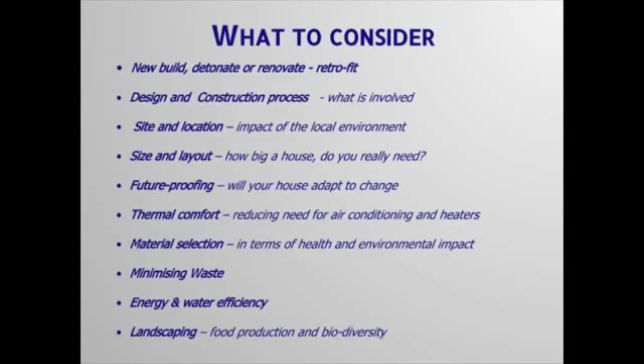So I'll cover the design and construction process a bit. Site and location is obviously crucial in terms of how you design a home that's going to work well with the environment. The size and layout can have a huge impact. Future proofing - we build our homes for probably a minimum 50-year time span. If we do it well, they'll last much longer. So you're talking 2 or 3 generations are going to occupy that building. So it's quite crucial that we do get it right and we make it work long into the future.

I'll touch a bit on thermal comfort - that's an area I do specialise in a bit. Material selection and minimising waste. Energy and water efficiency is very important, but I'm not going to go into that because it's such a broad topic, and we have had other talks on it. And landscaping, how to incorporate that, because sometimes that's something that is a bit overlooked. As I go through, I may skim over some things, so if there's something you want to know a bit more detail about, just feel free to stop me.

One thing that I guess is constantly changing is our understanding of what sustainability is and how we can do it. And I did mention that primarily our focus has been on minimising the negative impacts, and we should be really aiming to achieve positive impacts. How can we do a development that actually has a positive outcome?

The difficulty with that is the more we get into it, the more complex it is. There has been a focus in the past on the technology of it, putting solar panels on or making the house better insulated or whatever. But it's a much more complex situation than that.

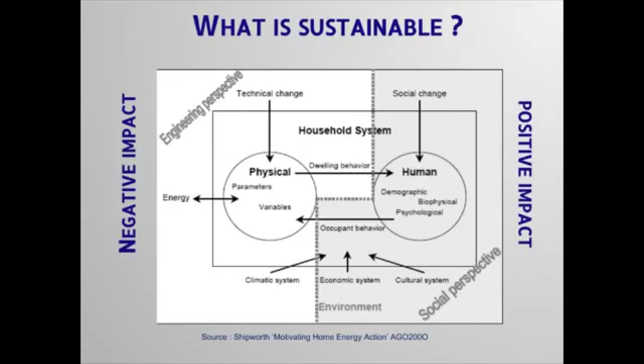It's the occupants in the house, how they use the house, it's their social situation. You can make a house a lot more sustainable, but you could be in a very unsustainable situation where you live - you might have to drive a long way to get to work. And so there's a whole lot of other factors that can impact on how sustainable your living can be. You'll see down the bottom there's even things like the economic system, which I find is a real challenge in my practice, is finding designs and doing a building that's affordable for people. In Sydney, renovations are very expensive, and the challenge is to do that in an affordable way, so that the client doesn't end up with an unsustainable financial situation. It's crucial that all these things are in balance.

In terms of positive impacts, we can certainly have a positive carbon output by putting on plenty of PV panels and reducing our energy use. But there's more positive impacts we can have on the social side.

If we take a house that's cold and unhealthy and turn it into a house that's light-filled, well insulated and a lot healthier, then there's a positive impact on the life of those occupants. And that has a flow-on effect in society in terms of reduced health costs, higher productivity, a whole range of issues. We can also have a positive impact in terms of increased biodiversity if we're smart, increasing plants and opportunities for wildlife and animals, because we're creating a healthy environment that will prosper more.

So you can see it's quite a complex challenge. Where to begin? If you're a homeowner yourself, doing your own research is most important, so you understand, so when you talk to people you've got a good grasp of what the issues are. Unfortunately, a lot of designers and builders may not be as educated as you would hope on these issues.

And building a team is an essential item. Traditionally, the construction industry is run on a more adversarial type of arrangement, which is not ideal. If you really want a sustainable outcome, you've got to break through that, and the way to do that is to create an open, honest atmosphere, be clear about what you want, and engage everyone.

You can select a designer, and there's plenty of opportunities to do that. We've mentioned the Speed Date a Sustainable Designer. The Sanctuary and ATA websites have listings where you can search for sustainable designers. Your Future Home is another one that has listings. So there's opportunities out there to speak and get a grasp of someone you're going to be able to work with.

The crucial thing with the team you put together is it's a long process - it may be 12 months, but sometimes it could be 2 or 3 years by the time you talk to someone before you have a finished product. So you've got to find someone that you can work with. They're going to get involved in your life in a fairly serious way, so it's quite crucial that you feel comfortable with them.

And I'm finding that getting the builder involved early in the process is very crucial to achieving this collaborative approach. I'm tending to do that prior to getting council approval. Once we have a design nutted out, I then go and get some indicative prices from builders. Not only is it a good basis to check whether you're on budget, but it enables your client to meet builders and engage with them and get some idea of who they could work with.

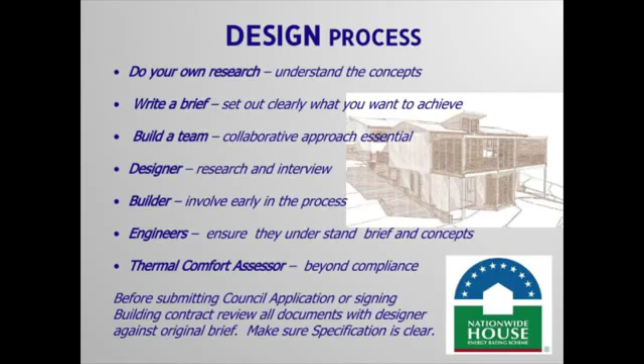Just a note there about making sure things are included before you commit. It's much harder to change things when you're halfway through the process.

We talked before about how crucial site is. If you don't have a site yet, these sort of things are worth considering when you're looking at sites—whether it's an inner urban situation, you're going to have challenges there. Maybe acoustics might be a real issue in that environment. Overshadowing certainly could be. The local climate, microclimate, where do the breezes come from, those sort of things, where does the driving rain come from?

The water cycle is probably more crucial on larger rural, semi-rural situations, but it's still worth considering.

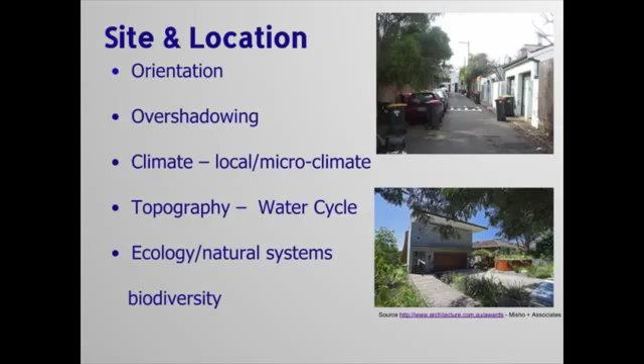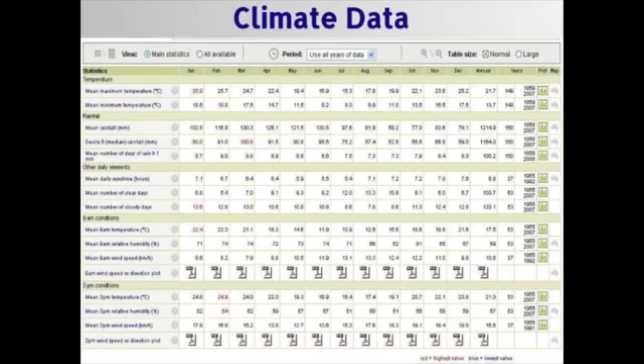There's lots of good climatic data available on the Bureau of Meteorology website. So for your specific site, you get mean daily temperatures, relative humidity, and even the number of cloudy days and clear days, which can be useful in terms of thinking about solar design.

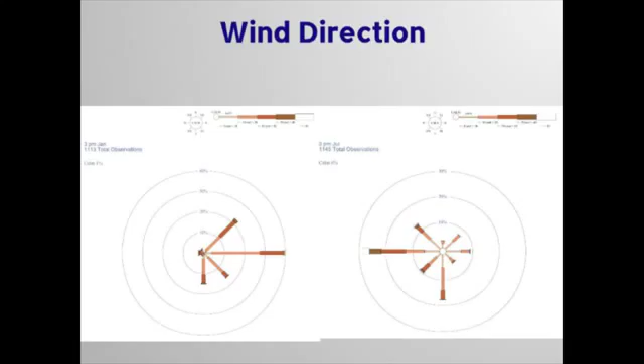So in summer afternoon, all of the winds are coming from the northeast or the east. This is July, 3pm—it's totally reversed. So straight away you can see from that, you've got a concept of how you should open your house and how you should be able to shut it down.

So it's a matter of getting familiar with your site in that sort of way.

Size and layout. We as Australians have the dubious reputation of having now the largest houses in the world, and that's really not sustainable. So we need to be smarter in that regard.

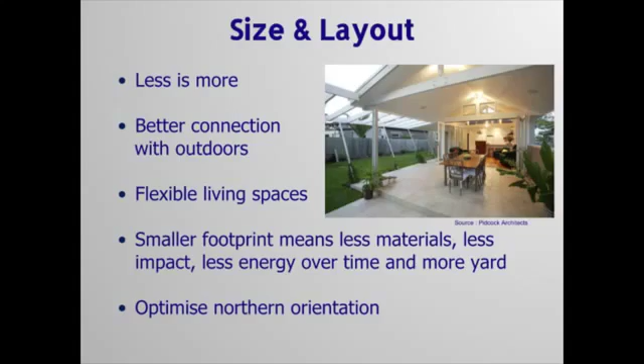One way to do it is we can make houses feel bigger than they really are. We can make them more flexible, and that also makes them more suitable for the future, because families change, our situations change. The obvious thing: a smaller footprint means you use less materials, there's less impact, you end up using less energy over time, and you end up with more yard, hopefully, which is becoming more crucial.

There has been a tendency to build big boxes which expand right to the maximum setbacks, but whether that's really a good approach is questionable. One thing to keep in mind in terms of solar planning is you need to try and optimise your northern orientation.

There's a few items—future proofing, as I've already mentioned. The lifespan of the house will be for a while. Optimising solar planning.

Durable materials. And going back to the size thing, it can be a matter of quality over quantity. You might build less at better quality so it lasts longer. You might end up spending the same money, but you might get better value out of it.

There's guidelines on livable housing, which are making houses more accessible for people in terms of general bathrooms, and there's a whole set of guidelines in there for all the service areas, and there's different grades where you can actually get your plans rated for their accessibility.

There's a push that all housing in Australia should be adopting these guidelines. We've got an ageing population. It's silly for us to be building new houses that we can't actually get around easily in.

As I mentioned, I'm not really going to talk about energy and water systems, but certainly isolating yourself from changes in power bills and those sort of things would help.

Changing technology is a bit of an unknown space. I think David was hoping I might cover things like sort of more sophisticated technology, monitoring systems, and your automated systems for homes. I feel that that's an individual choice. I don't think it's really necessary to make a home sustainable.

The technology is changing all the time. It's easy to plug these things in, especially now we're virtually going wireless with everything. The one thing I would think about, you probably want to allocate some space for a central hub, so you can have your major technologies there, your modem and those sort of things, and maybe even space for battery storage for your PV system, because that will become an important thing in the future.

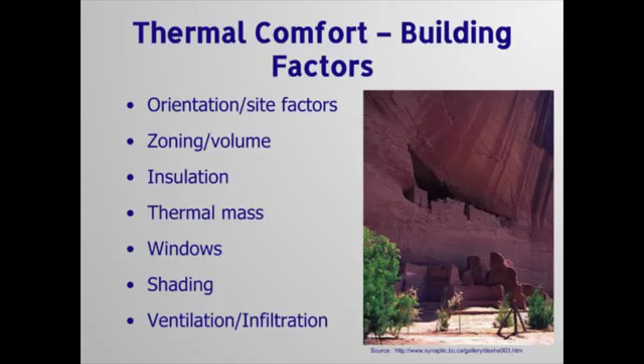The planning of it, insulation in the walls, the thermal mass, windows, how you shade the windows of the house, and ventilation, how you get fresh air through, or how you stop air escaping or cold or hot air coming in. And just going through those in a bit more detail.

How do we actually understand thermal comfort? These are the factors that impact on us personally that will impact on our thermal comfort. So we need an air temperature that's at a suitable range, and that varies for individuals, and it varies depending on what you're doing. So it can vary depending on all these factors.

So your activity, your clothing. We can dress for the climate, like these guys have done there. But if you're in a gym, you're going to be generating a lot more heat. If you're putting a gym inside your home, you might want to consider how you're going to ventilate that space. You might want a small air conditioner in there to treat that heat load.

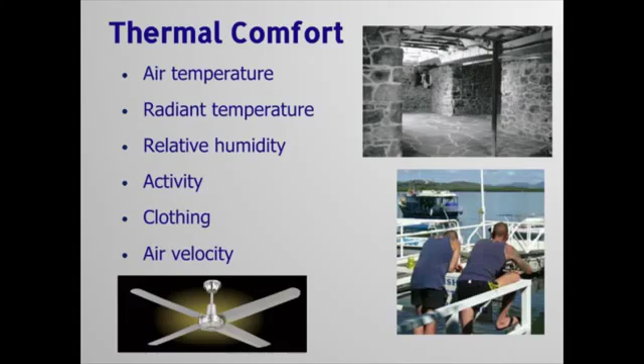Radiant temperature is the temperature given off by surfaces. I've shown a picture there of a basement with stone. You probably know this when you go into, say, an old double brick home in summer, and you can feel how cool it is. It's a term called coolth, and the walls are absorbing the heat out of the air. The trick with thermal mass is to help stabilise the air temperature through the radiant process.

And air velocity, the amount of breeze you get through fans or opening windows. You all know what it's like when you're sweating and you open the car window, you get the evaporative cooling effect. When the air passes over your skin, it evaporates the sweat and you feel more comfortable. Sydney is a challenge in late summer with our humidity, and it can be difficult to design that in without having to go to air conditioning at some times, but it's something to consider.

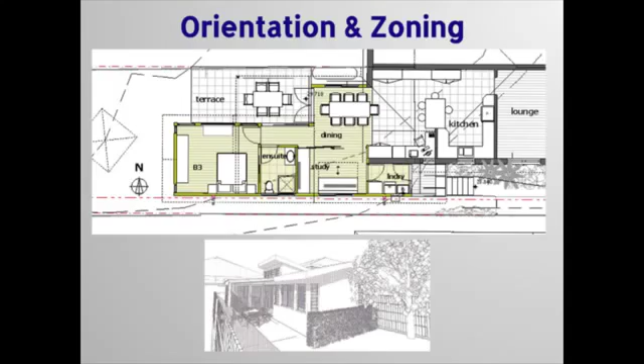Smaller windows on the west - you might want to enlarge those if you have a view - and you tend to put your service rooms on the southern side, so they're not as crucial in terms of getting the winter sun.

Insulation - I won't go into that in much detail, there's a whole range of them. Obviously, during construction you want to get as much in as possible. But if you have a thermal comfort assessor on board and he models your house, he'll be able to tell you what the optimum level is for the different surfaces.

There's good products. Some of the foam products are really efficient, but they're quite expensive. These products are more affordable. Polyester has some advantage because you get a high recycled content. You get some materials such as straw bales, which are in themselves insulative, and that can be really good. AAC, for those who don't know, is Hebel blocks - aerated autoclave concrete.

One thing to keep in mind is a challenge now - if we make our houses a lot more insulated and better sealed, we then can run the risk of condensation in the roofs and so forth. So you have to consider being able to ventilate your roof, and that normally is a requirement in the winter time, and so it contradicts what you're trying to do in terms of sealing the building and keeping the cold out.

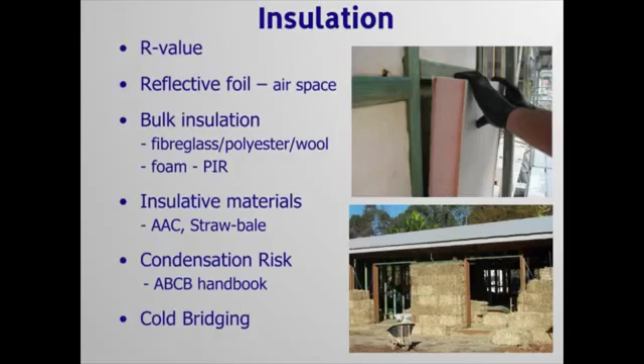So there's things to be aware of there - using breathable membranes in the roof and in the walls allows the walls to breathe, or using actual building materials such as straw bale with clay renders or mud bricks, which are materials that naturally breathe and won't hold the moisture in.

You'll have to tell me how I'm going for time-wise.

As I mentioned, thermal mass is crucial in terms of helping to stabilise the temperatures. There's a whole range of them there. The crucial thing I would stress is that it needs to be on the interior. Traditionally we build brick veneers, we put all our thermal mass on the outside - it heats up, it cools down, and we don't get any benefit of it. The insulation's on the inside.

So you can reverse that and put the insulation on the outside, brick on the inside. I feel that probably the most effective way for our climate here is you do lightweight external walls, highly insulated, and make your internal walls masonry or thermal mass. You can do it with a slab if you've got good orientation, but yes, it's not very effective hanging on the outside of the building.

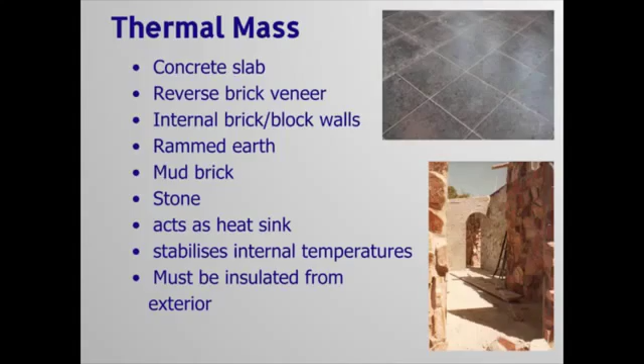Masonry is durable on the outside, which is why you face brick, and there's one reason construction's traditionally gone that way, but from a thermal point of view it's not very good. It is a challenge with these type of materials, which are really good from other sustainability points of view - they're low energy, renewable products, they have a nice feel, but they have poor insulation value. They have good thermal mass, so the challenge there is how do you get the insulation on the outside?

And that is sort of limiting their use a bit, unfortunately.

Glazing and windows are your weak point. That's where you're going to lose all your heat or gain all your heat.

There's now a lot of use of low emissivity glass, which helps stop heat coming in, so it's very effective to use on the east and western windows. Double glazing is very effective to minimise your heat loss, and it can slow down your heat gain.

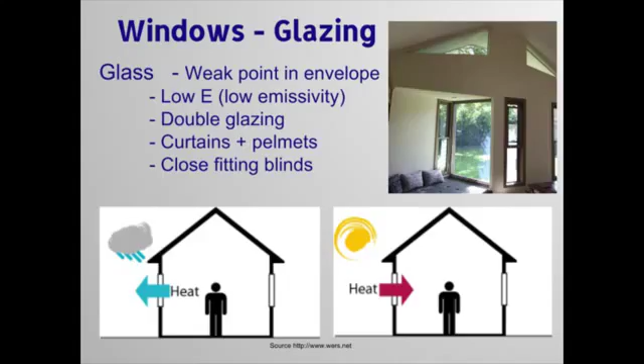But also curtains with pelmets will do the same. A good heavy curtain with a pelmet will be as effective as double glazing, and probably cost the same as well. So it's more a matter of what your choices are.

Window frames - there's quite a choice there, and they all vary thermally. The metals, aluminium and steel, because they're good conductors, they're going to gain a lot of heat or lose a lot of heat. There's now thermal break aluminium windows where the frame's split into two with an insulated barrier between, which slows that down. That's quite expensive.

Steel have become quite trendy. Steel windows over there were very popular back in the 30s, but they perform very poorly. In fact, none of them are actually officially rated under the window energy rating scheme as yet, but they are being used.

Timber works very well thermally, it's a poor conductor, but it has durability issues - you have to keep painting it or sealing it. So they developed the composite, which has durable aluminium on the outside and timber on the inside. That gives you a thermal performance somewhere between the two, and the cost is somewhere between the two as well.

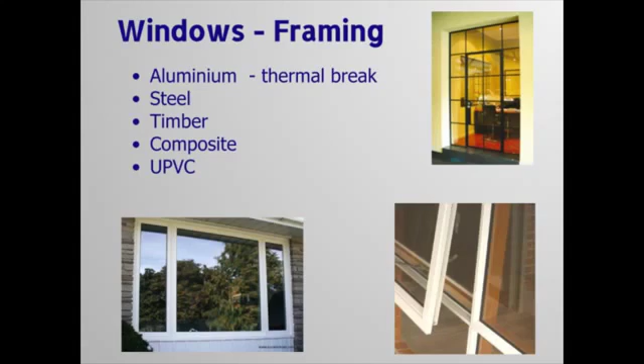Newer on the market is PVC. Generally they come from overseas, from European or American manufacturers, so they're very good quality in terms of air infiltration - they seal very well, they're durable. There are some questions about the manufacture of the PVC and the toxins created in that process, but thermally they do very well as a window. Style-wise, they're not everyone's cup of tea.

There is a window energy rating scheme similar to the appliance scheme, and you can get a rating for heating or cooling depending on what your need is. So if you have a west-facing window getting a lot of afternoon summer sun, you probably want a good cooling score. If you've got a big picture window looking down over the harbour facing south, you're going to lose a lot of heat out that window, so you probably want a good heating score.

The performance values they look at are what's called the U value, which is the heat transmittance - it's the inverse of the R value, which is the heat resistance for insulation. Your normal window is about 7 if you get a decent window, 4 if you get a really good double glazed window, it's under 3, maybe 2.5.

The other important one is the solar heat gain coefficient, and that's a measure of the amount of direct solar heat that's transmitted through the window once the sun's on it. Approximately it's like 0.7 - it's transmitting about 70%. It's not exactly correct, but it gives you some idea. So a good one, a bit lower than 0.4, is transmitting less than 40%.

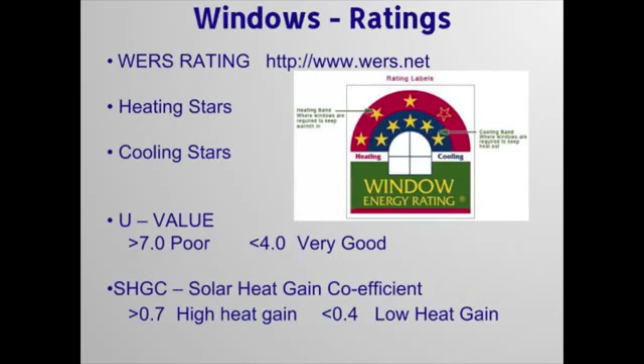So that's where the low E glass will come in. Or if you get double glazing and you have low E coating on one of the panes of double glazing, you'll get a really low U value and a low SHGC.

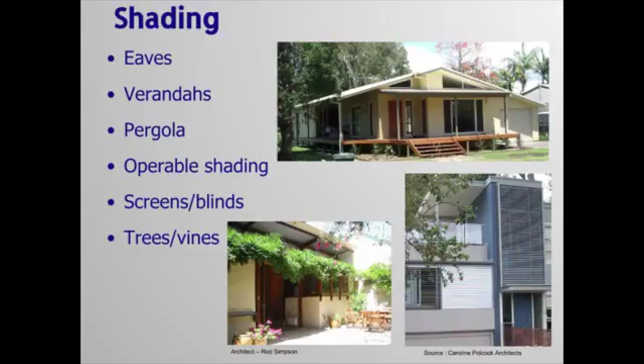Shading is important for sun control. Eaves are the traditional way, although style-wise there's been a tendency to lose eaves. We've also forgotten about the good Aussie veranda, not only as somewhere to help shade the house, but as an extension of the living room. This one here is a holiday house on the north coast, but it just connects better to the yard, and the people who use it sit out there a lot.

Pergolas are good. Adjustable, operable shading is important, especially in the in-between periods where, with the way the climate's going, we can get a 30-plus degree day in October. And if your eaves are designed for the middle of summer, you're going to get a lot of sun coming in. So if you've got adjustable blinds, awnings, even shade cloth that you can roll out, that gives you a bit more flexibility.

Pergolas and growing trees and vines create a nice space, and can really help with the shading. And I've got a pergola on my place which has grapes on it, and you get to eat them as well.

Ventilation's crucial. Look at understanding where your breezes are coming from, getting the plan form right. Remember that long and narrow plan from earlier, so you don't have a room that's landlocked or blocked by another room. Ideally, each room should have windows on at least two sides.

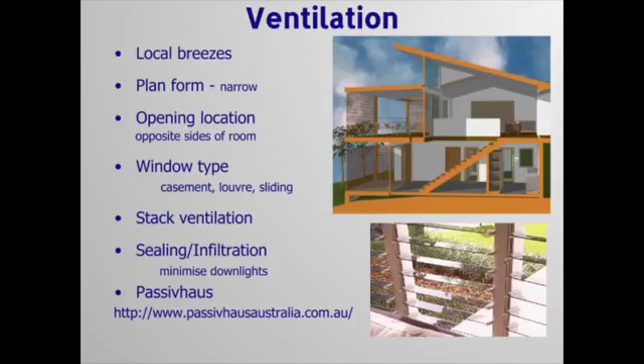Stack effect ventilation is like a chimney, using the aspect that hot air rises and exits at a high point, which draws more cool air in. Often up through a stairwell is a good spot to do that.

Sealing and infiltration, I'll go into that in a little more detail. If you really want to be at the cutting edge, Passivhaus is a German initiative. They're doing very efficient, very well sealed buildings, highly insulated, and geared to use a minimum amount of heating and cooling.

There's some now being built in Victoria. They've only just started in Australia, but they do have a certification system. They're that well sealed that you have to have a mechanical ventilation system to bring fresh air in. It doesn't stop you opening doors and windows when conditions are right, but if it's getting too hot or cold, you close it down and get the air pumped in, and it can be treated, heated or cooled.

I don't think you probably need to go to that level for our climate here. Maybe Canberra or in the alpine regions. I think we can get quite comfortable houses without that.

Infiltration is something as an industry we're only really starting to come to grips with. There's requirements in the BCA, the building code, for sealing and minimising infiltration, but unfortunately, in my experience, the industry and certifiers aren't really aware of this, and it's not really being implemented. So I think it's something you should raise with your designer and builder.

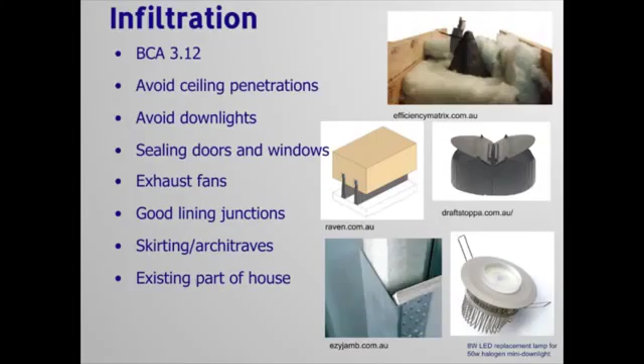And that's a crucial part of renovations. You might do an extension which is all well insulated and very well sealed, but the old part of the house is still leaking like a sieve. So it's a matter of looking at that. It can be a challenge, old floors move and so forth, but it can do a lot to improve even the old wall vents, which were originally put in because of gas lighting, so there was some fresh air coming in, so people didn't get poisoned.

They should be sealed up, so you're not just losing all your warm air. This is in old brick homes.

Thermal comfort - the assessor will create a computer model, an algorithmic model of your house, and do an analysis of what the heating and cooling demands would be. He can help you optimize your design, and create temperature graphs of individual rooms.

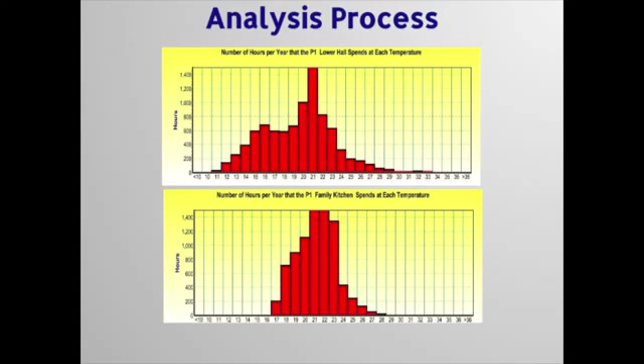This is what a house under normal construction would be, and this is what we were trying to get to, where you can get your temperature in a steady comfort range. And it can be done, but it can take a bit of effort.

A lot of assessors aren't used to going to this sort of detail, so you want to ask them up front, can you do a detailed analysis? Because I don't want to just meet basic compliance - I want to make sure I get a house that's going to be a 7-star or an 8-star house.

It's usually done for new houses, not that often done for renovations, but you can do it. It'll tend to show that the old part of the house is performing really badly, but then it can show you what's going to be the most cost-effective strategies for improving your old house.

They can change things - change the type of window, change the insulation, even change the roof colour - and you can see straight away what the impact's going to be. So it can be used as a design tool to help you make decisions about materials, insulation levels, types of glazing, or types of shading.

How much shading do you have on the west? What if we extend it another metre? Is that going to improve the performance significantly to warrant the additional cost?

This is a case study of what can be done. This is a house on a site which is long, running north-south, so this is looking from the southwest. The long sides of the house are facing east and west, so it's not ideal orientation, but the design did have a lot of large glass on the north facade, so they were collecting lots of sun.

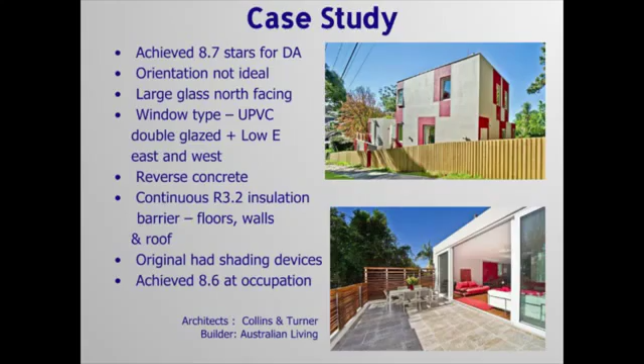There were some other changes which resulted in that difference through different floor surfaces. They used a bit more tiles. They had concrete slabs - concrete slab is good thermal mass. If you put a carpet on it, it insulates it, so you're not getting good heat transfer into that thermal mass. But if you put tiles on or you leave it as bare concrete, you get much better performance.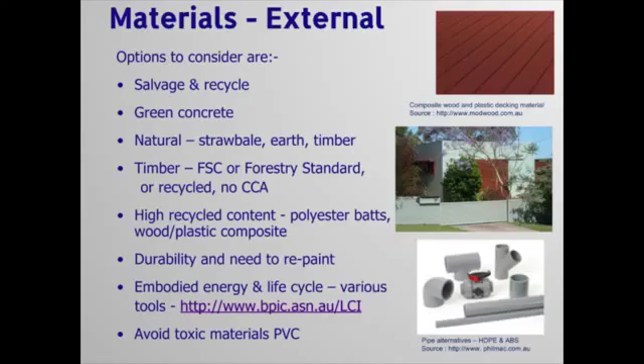Okay, I'll just go through these. There's a whole lot of sustainable materials, and I think you can read about them in Sanctuary and so forth. There's some new advances in concrete - mainly, not promoting any particular company, but Boral have some new products available there.

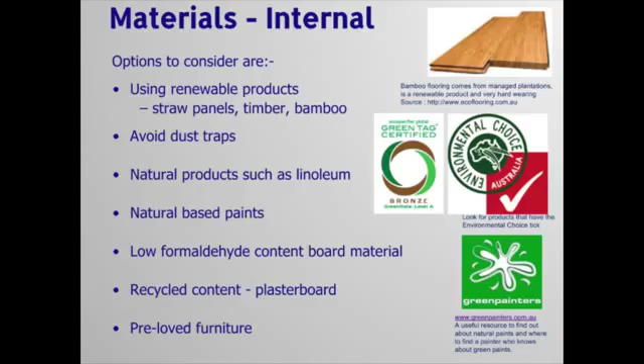Durability is an important consideration. And again, for internal use, it's more a health concern about pollutants and low VOCs in paints and materials. There's lots of environmental certification for products, so you can see whether the product you want to use has been tested for its environmental credentials, which can help you make a choice.

The other thing to look at is waste minimisation, which has been getting a lot better, primarily because landfill sites are recycling a lot more. Concrete and brick has been crushed up and used as road sub-base and aggregate in concrete, along with a lot of the timber and so forth. Asbestos and those sort of materials, you don't have much choice - they really need to be disposed of properly.

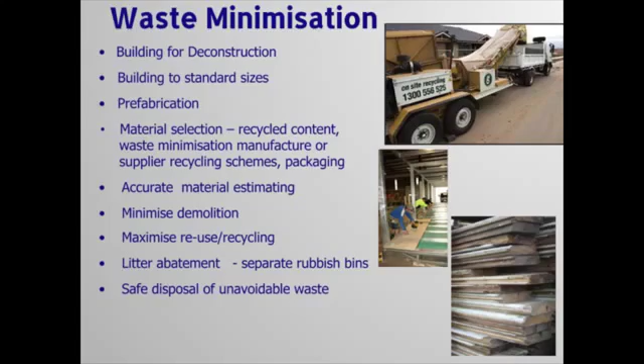But you can make choices if you do your research on what the recycled content is in the material, and even packaging, if they've thought about the packaging the material comes in - because at least I saw one figure, about 10% of the waste on a building site is cardboard. And I'm sure there's a lot more in terms of plastic as well.

Getting the contractor on board is another thing - you want to get him involved early in the process. A lot of builders want to just demolish. It's quicker, it's easier, mate, I don't want to have to bother. But if you can get them engaged, or if you can do it yourself, you can do a slow deconstruction rather than demolition and try to salvage as much material, that can be a more affordable way to do it.

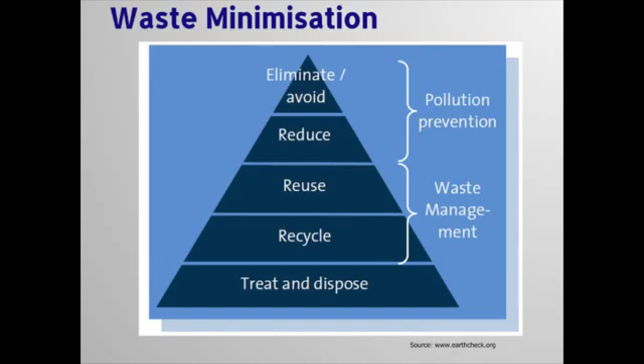Prefabrication is much more efficient, there's a lot less waste, and there's some really quite good quality prefabricated dwellings now available. I showed you that small extension earlier.

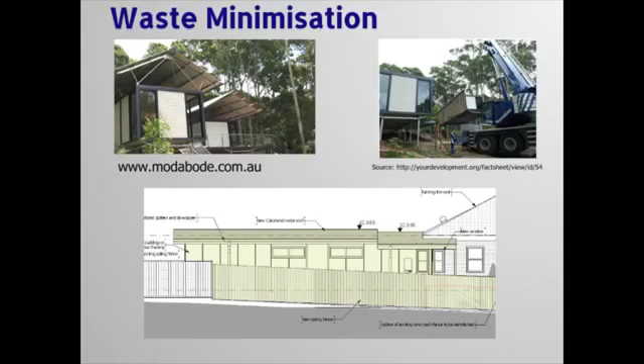This is just a simple sample. This wall has been set out to the board width. For affordability, it's just simple fibre cement with a batten over the top. But they've been spaced, and the windows have been sized to suit the sheets, so there should be minimal cutting. They might need to cut the length, but they might have enough to do some of the eaves with that. So it doesn't cost any extra, it's just being a bit smarter in how you lay it out.

And just, again, as we're talking about deconstruction - avoiding adhesive, using mechanical fixings, and thinking about what things are going to wear out first.

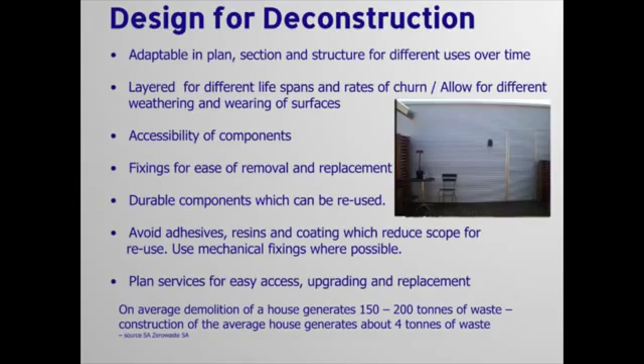And this is an interesting fact: if you're not sure whether you're going to renovate or knock down and rebuild, a lot of the project home builders are selling the concept of knock down and rebuild because they can do it much more affordably. It's just the environmental cost that's not really factored in. But you can just see the amount of waste that can be generated through that process.

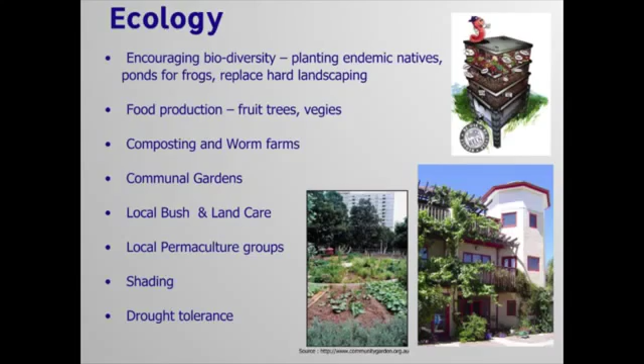Incorporating food growing and biodiversity into design is something that needs to be considered. I don't think I need to go into much detail on that.

And again, these are just some things to think about. Before you start on site, I think it's good to sit everyone down and talk about what you really want to achieve. As I said, basics just tick the box - you want to be going beyond that.

Ensure that the specification is a useful document, but residential builders aren't used to reading them. So again, at this meeting, you want to get them on board, including the subbies, and point out, even highlight in a different colour, the crucial things in the specification. Because their tendency is they'll just do what they've always done, so you want to bring it to their attention. And that's why you've got to be on your guard.

And as I said, insulation is an area that the industry is still learning. So you want to be on your feet, asking them questions and making sure they understand how those products are going to be installed, and properly installed, especially in terms of dealing with condensation issues.

And operating the house - we get manuals for our cars. We spend a lot more on a house, but no one gives us any guidance on how to use it. It's just something to think about. If you get involved early in the process, you probably won't need a manual - you'll probably be able to write the manual, hopefully.